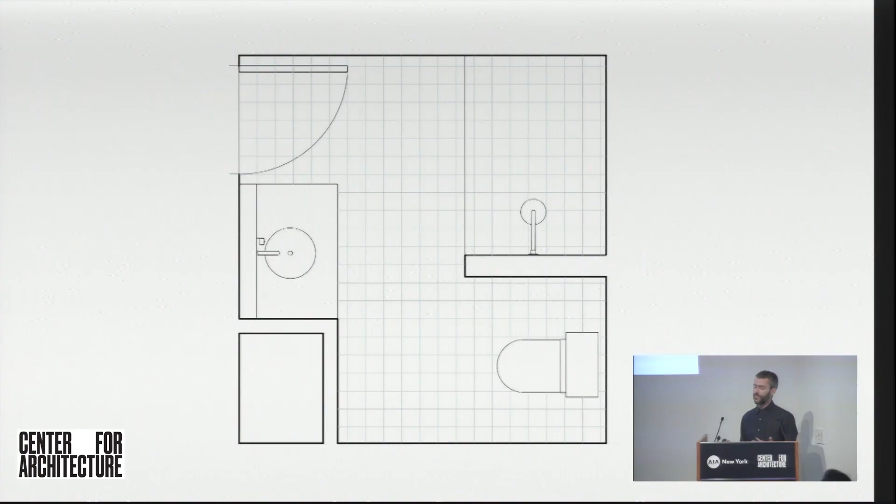So that started really with the premise of how do we install grab bars and other features like that that don't take away from the feeling of the bathroom. So the more we started thinking about it and talking about that, I really started trying to think instead that maybe the grab bar should be the protagonist of the project.

So the grab bar, disguised as a towel bar, wraps around the entire perimeter of the room. And instead of plumbing fixtures being something that take up all the wall space, they're clustered together in the middle as a kind of totem to everyday rituals.

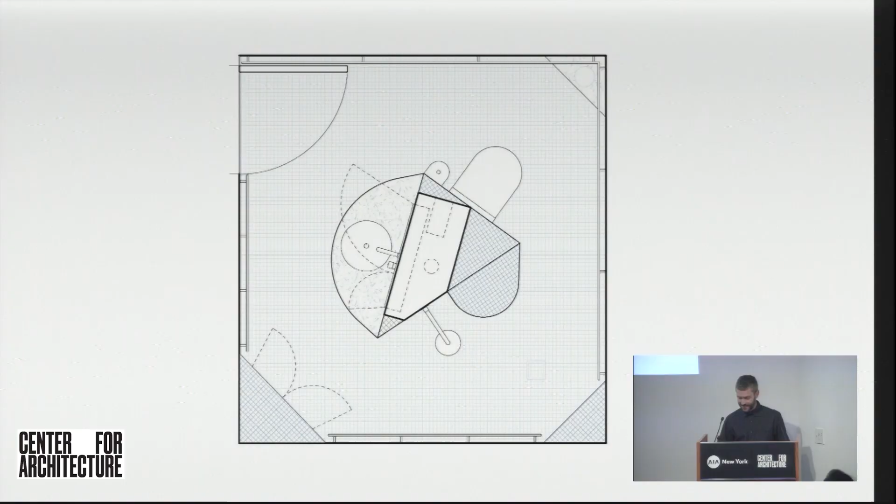The space is totally barrier-free with a shower and a toilet and a sink, and accommodates many individuals who can use the bathroom at the same time. Perhaps your spouse is showering while you're brushing your teeth. And at the same time it's a playful space.

And let me see if I can successfully play the video. Is that true?

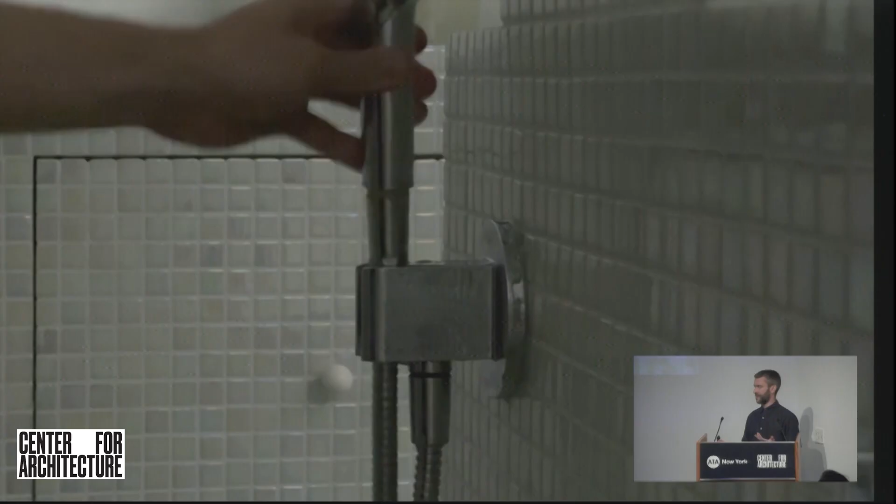I was really looking for it not to feel like it's designed for getting older. So the towel bar grab bar combo doesn't ever give away the fact that it's designed to be structural. The entire bathroom is wrapped in the same reflective tile that plays with light and movement as different people come and go from the room, and really allows the bathroom to feel like a sanctuary rather than something that is increasingly difficult to use over time.

The second project I'm going to talk about is for a house in Long Island on a somewhat unusual site that is very long and spans between two very different worlds. On the right, the walkable pedestrian area of the town of Greenport, and on the left, the wetlands. So the project is about spanning this difference between these two seemingly opposite ways of living in a vacation house. The client importantly wanted to not feel like the house was separate from the town, so it really was about bringing those two worlds together.

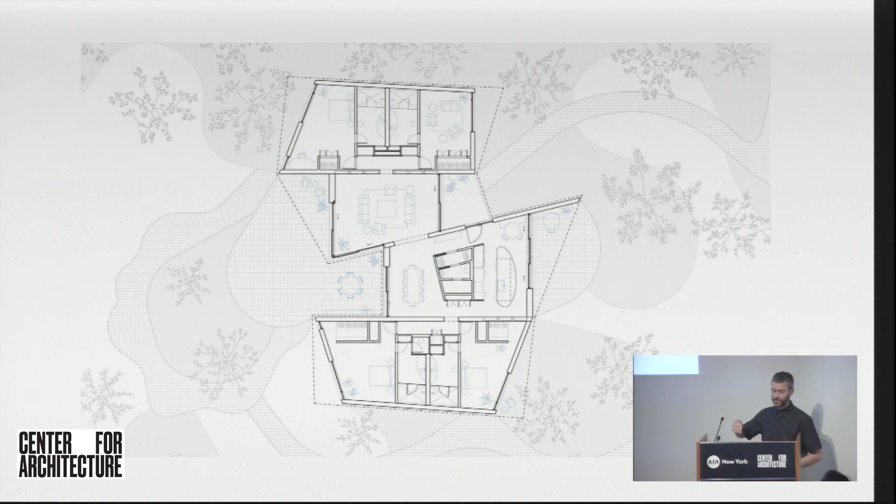So the plan is organized around a series of walls, and those walls subtly shift in angle to allow some of the spaces to open more towards the town and some towards the wetlands. The bedrooms are on the north and south side of the house, and as residents move into the more shared areas and into the bedrooms, they're offered an oscillating experience of seeing different framed views out to the landscape.

The roof that spans over these walls is curved to take on a variety of different scales and complements the varying scale of the plan with a varying scale in section as well. So it becomes a kind of vocabulary to modulate small intimate spaces and large collective spaces. This is also the project that there's a model of over there, so you can look at that after.

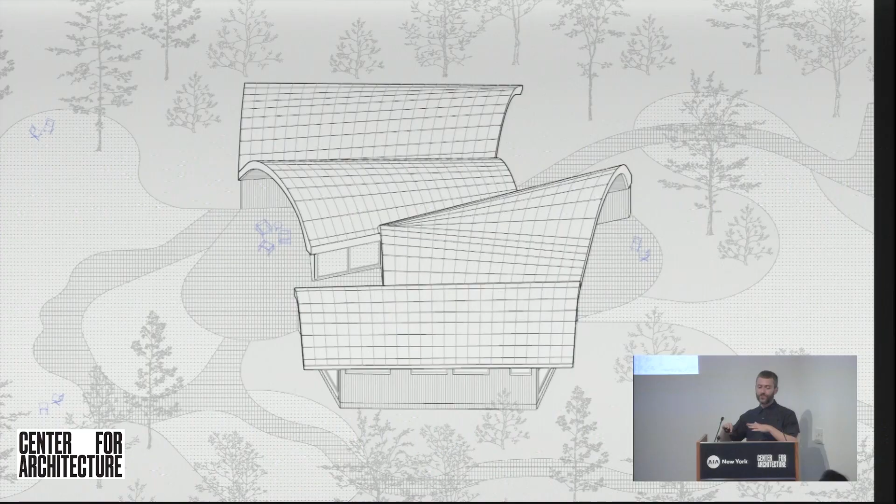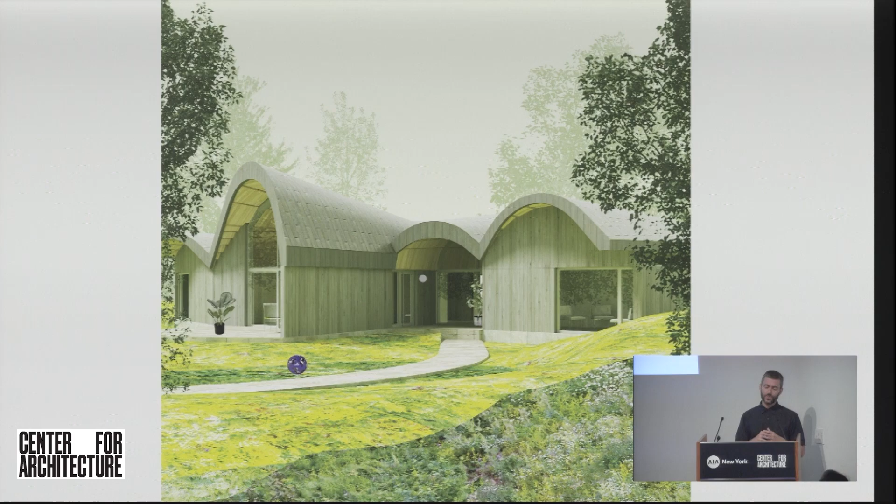The curving of the roof also allows the house to stretch out into the landscape and enclose some of the areas to become extensions of the living areas that get folded into the house. Because of the orientation of these walls and these varying heights of the curved roof, despite the fact that the house has one primary orientation, east-west, it kind of has no real front to it. So as you're walking around the house, it always takes on a different profile.

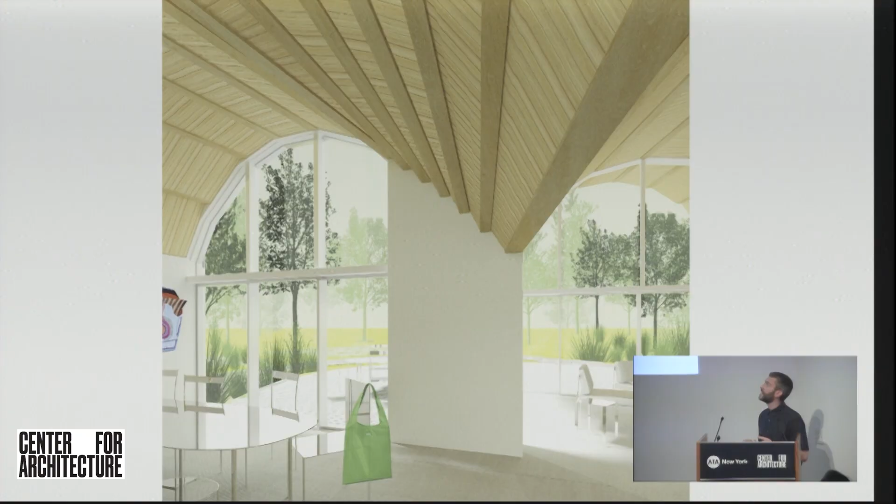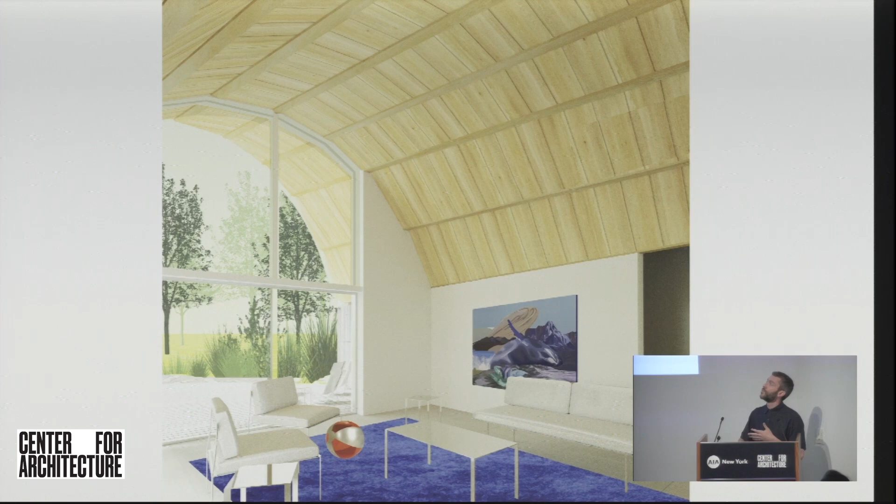On the interior, the roof curves down to softly divide public or shared areas of the house without needing complete walls, while still creating pockets of living areas. Bedrooms have the roof curve down lower, creating a more intimate experience, in contrast to the more shared areas where the roof lifts up higher and frames much larger expanses out to the landscape.

Coming back to the site, it really is a way of stitching together these two sides of the site. One interesting way that happens is that the two sides of the house look almost the same as each other too, so there's a way that you can leave the house from one side or the other and almost find yourself in a totally different world. It's a way of mapping these two worlds onto each other.

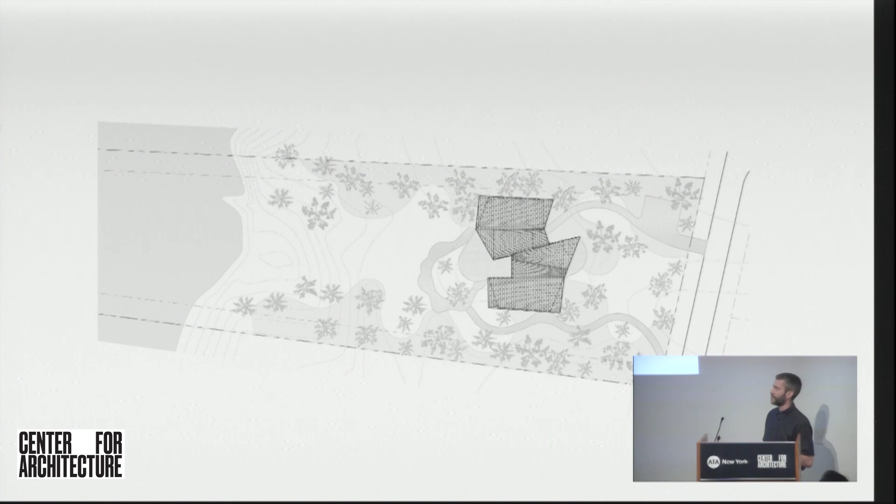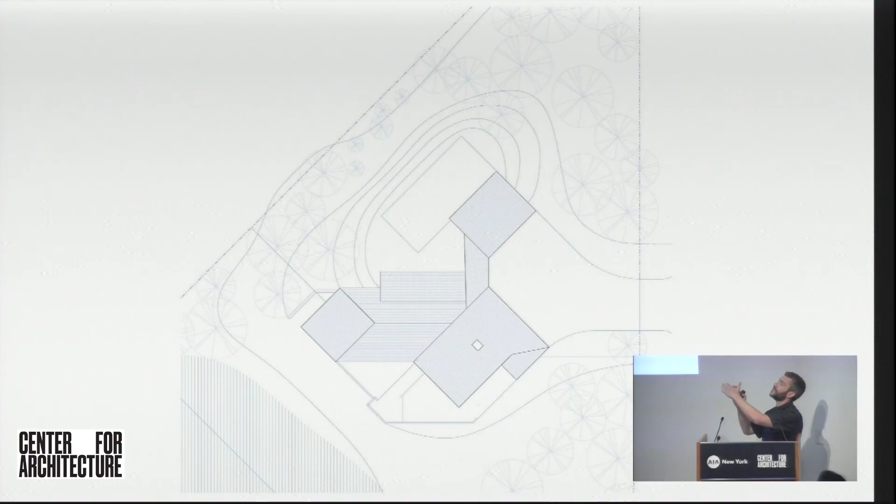The next project is an addition to a house in Cape Cod. This is a modernist, kind of strange modernist house. The client came to me looking for a way to add a second floor on this house, which at first is a seemingly terrible idea because certainly the best thing about this house is its super eccentric roofscape, in part put together because of the strange intersection of two streets that gives this a triangular site.

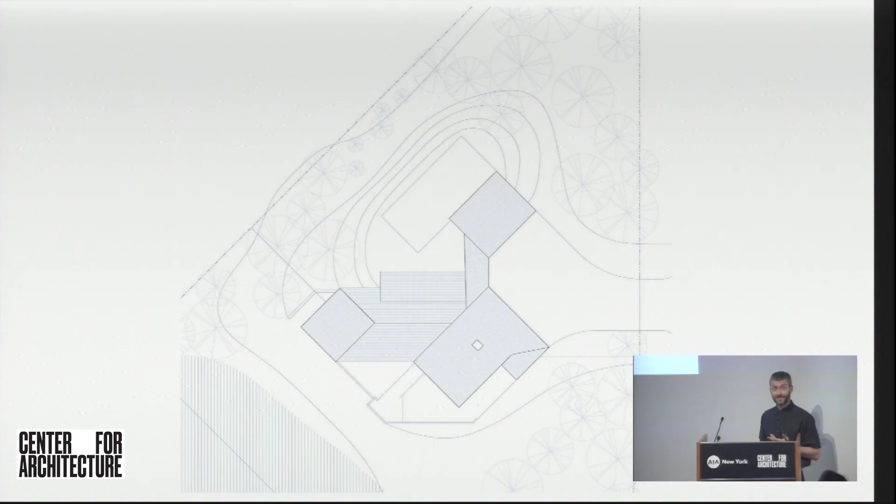So it's a collection of all of these different shed roofs that make this amazing landscape on the roof. So the puzzle really became about how to stitch a series of volumes into the roofscape as opposed to putting something on top of it.

So a series of three separate rooms, each at different elevations, offer something totally new to the existing house while also trying to make themselves totally a part of it at the same time. These volumes each find places to lock themselves in or tie themselves into folds, corners, or edges, finding opportunities to become collinear or parallel to existing parts of the house—finding geometric ways to couple itself with the existing roof, making it inseparable.

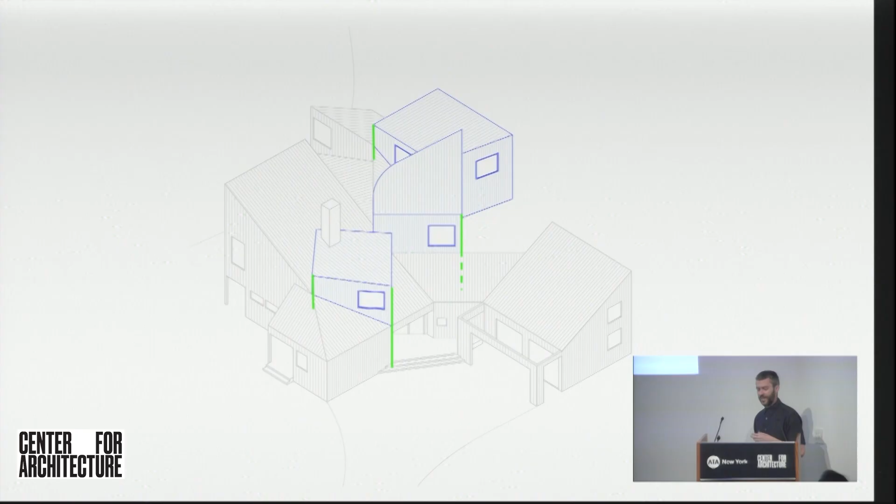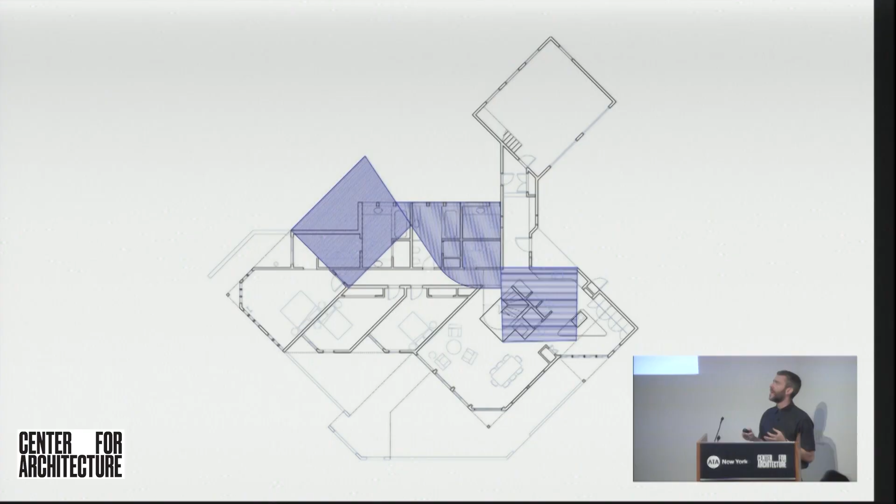The other way that happens is through the plan. The existing plan of the first floor of the house was primarily one story. It had a single room on the second floor that these three volumes were added onto. The existing plan has a sort of atypical, unusual use of 45 and 90 degrees because of those two streets it's organized around. So trying to think about where and how to locate these three new rooms was about finding opportunities within this logic of the plan to tie in these new spaces.

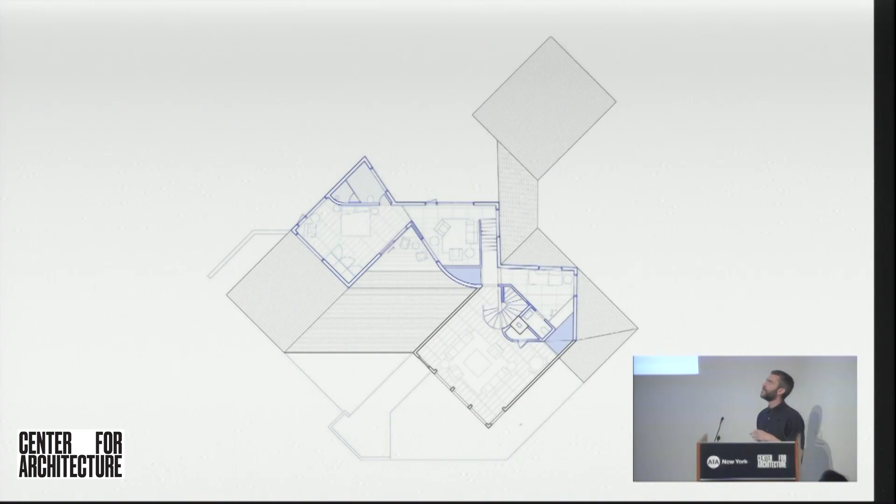And again, it uses those various points of corners or edges that extend from the existing structure into the new one to make these things seemingly inseparable from each other. But despite following the logic of the existing house and plan, the three new spaces are totally different. Unlike every other space in the house, this is a string of three new rooms that are all four-sided and connected through their corners, becoming a kind of thread of spaces with a totally different logic of circulation. By moving through their corners, it opens up the other three sides for expansive windows out to the landscape.

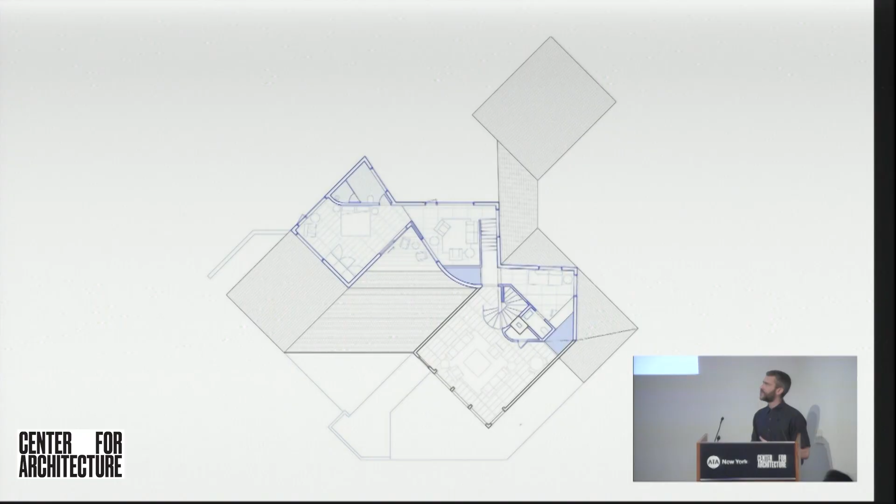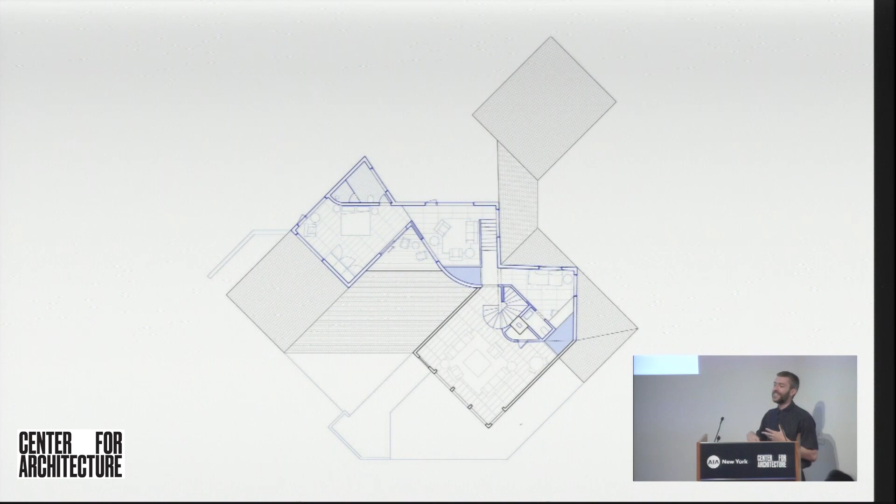One of the strange things about this house was that it seems to have been designed only to view the sunset, which is strange because it happens for a very short period of time. So there's almost one side of the house that doesn't have any windows, even though it's in a very bucolic place. So one of the things these volumes do that the house can't do is bring back that panoramic experience.

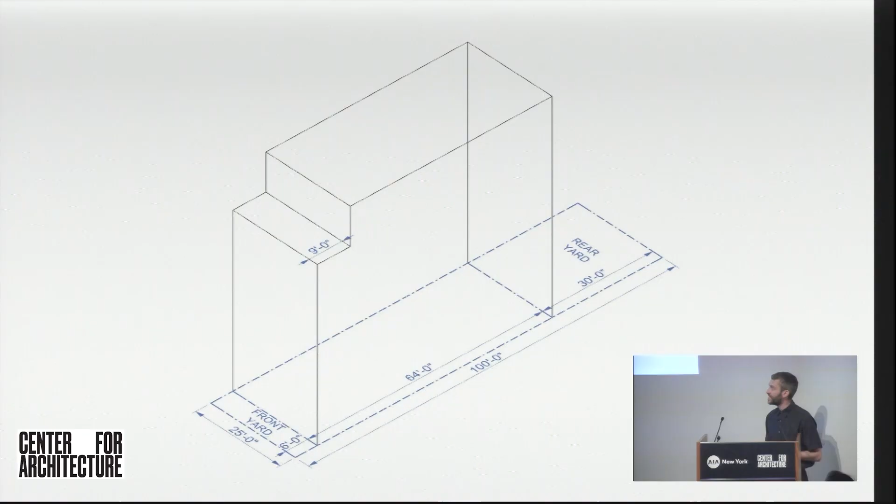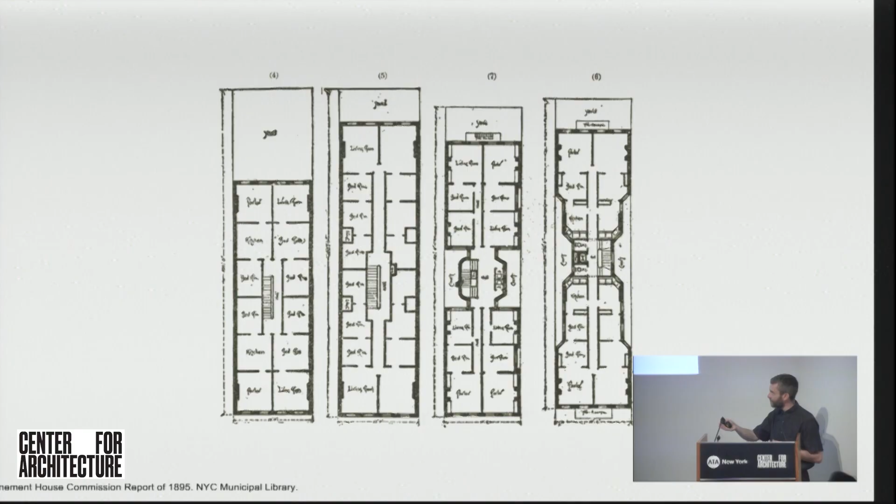The commonness of this problem, particularly for multifamily housing, is not new. We can think back to the era of tenements. This is the Tenement House Commission report from 1895, already 130 years ago, struggling with how to solve the narrow site with windows on the small sides. On the left is the conundrum of the tenement with many windowless rooms, and already at that time people were starting to brainstorm other ways of thinking of the typology. This turns into the dumbbell plan we still see all over the city today.

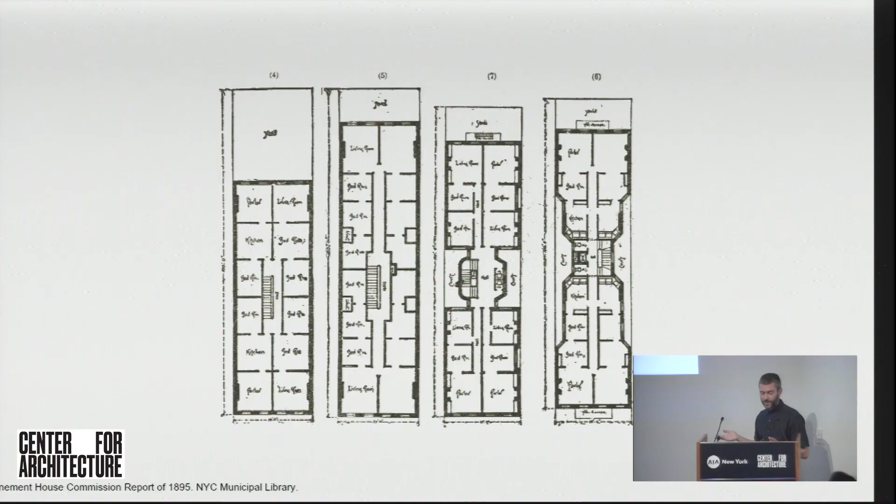So in thinking about this project in 2025, this is a site in a neighborhood with many other similar size lots and buildings, which permits essentially a 4 or 5 story building on a 25 by 100 lot. That's the formula of almost every other building in this neighborhood, typically an apartment building with 1 or 2 units per floor, with a dark middle of the plan and a core of circulation.

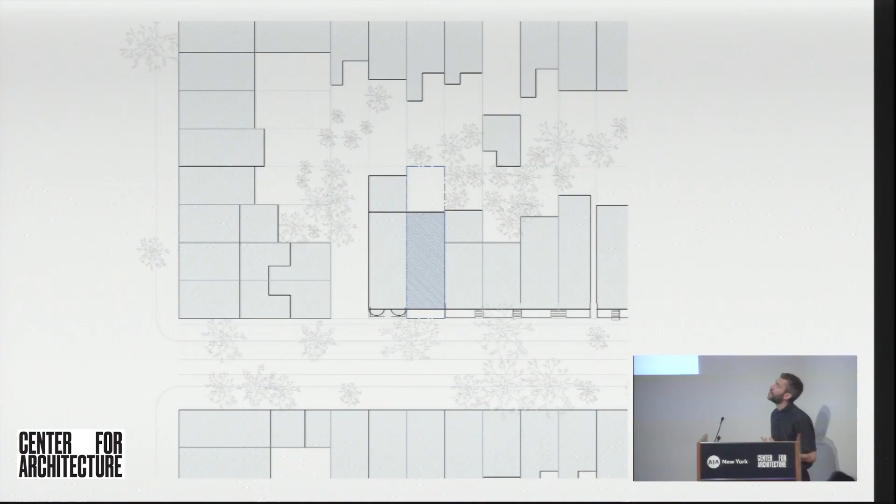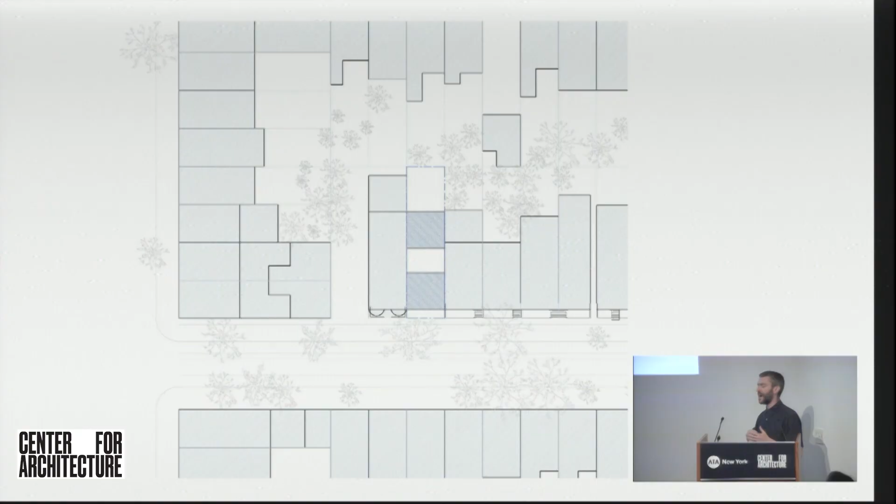So in thinking about this puzzle, we were interested in asking more typologically, what could we change to rethink this problem? We decided to split the site in half. Instead of one long site, it's 2 tiny towers, 25 by 24, with an outdoor space in the middle that becomes a hybrid between a stair, a balcony, and a fire escape, and also becomes a space for outdoor living. That center stair stitches together the 2 sides of the site.

The site is entered from the street and circulated up through this stair in the middle of the project. Unlike one unit per floor with 4 units, this also has 4 units, but they're 4 duplexes, 2 in the front and 2 in the back. That means for the same square footage, they have twice as much facade and twice as many windows. It's a way of switching the priority of how to organize the space given the same constraints.

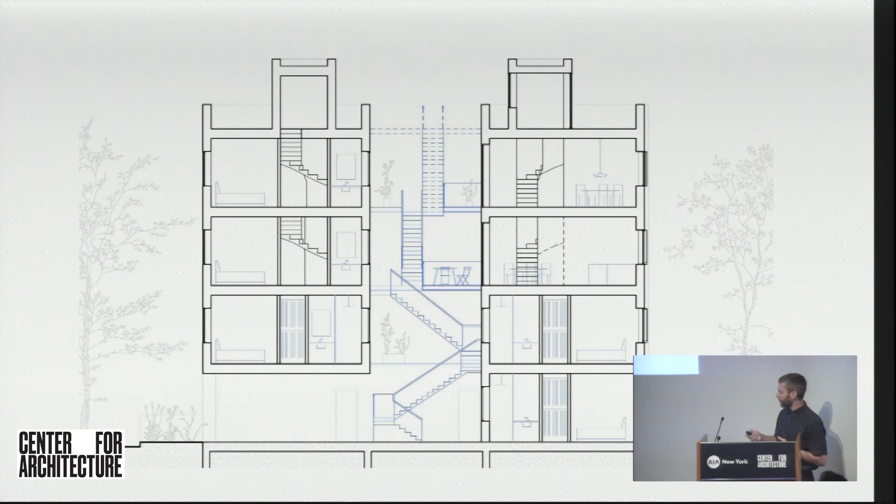On the ground floor, you enter under the first building and walk up the center stair. The bottom two units are accessed from the ground floor. On the upper floors, the living areas are split between each floor of the duplexes. So there isn't one living floor and one bedroom floor, but living spaces spread between each floor, allowing for maximum diversity of spaces on multiple levels with access to outdoor spaces in the center area, and also views out to the rear yard and the street.

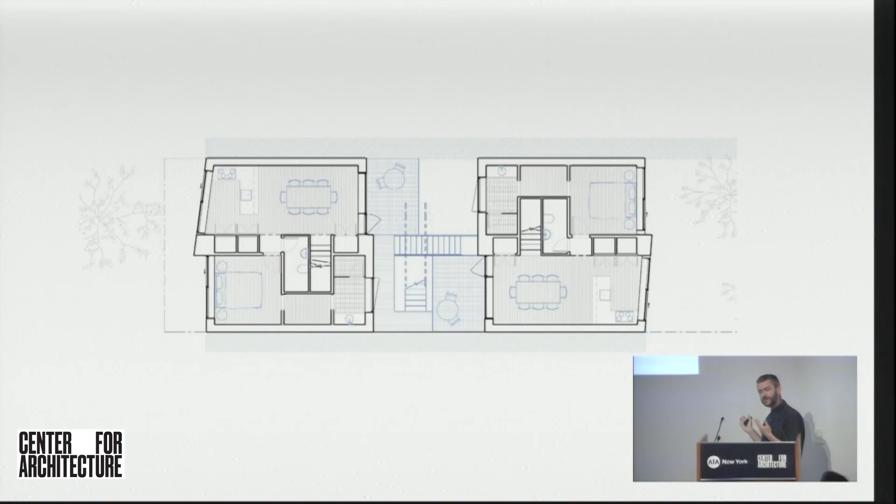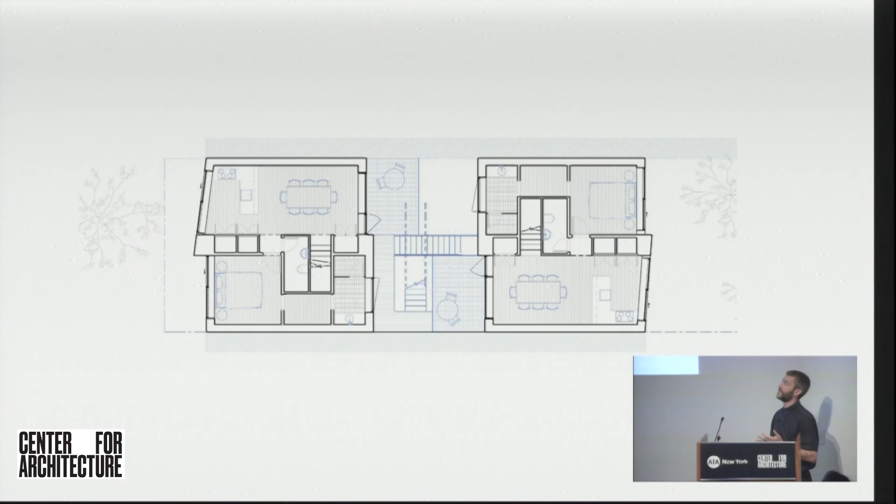The plan is also divided lengthwise with a subtle shift that allows for variation in the orientation of the windows on the front and back, which is a kind of interpretation of the townhouse bay window. This allows for a different orientation of windows to let you feel more expanse out towards the street or your surroundings. Even just a subtle shift allows for a different perspective in each of these different rooms that you find inside.

The center space is a kind of collage of expanded stair landings that become living spaces, but we've also been calling it a kind of jungle gym space because of its dimension. There's structure all around you, and it becomes a three-dimensional way of moving vertically through the site. Living spaces can extend out into these areas, and as you move up higher into the building, they also offer views out over some of the lower buildings around.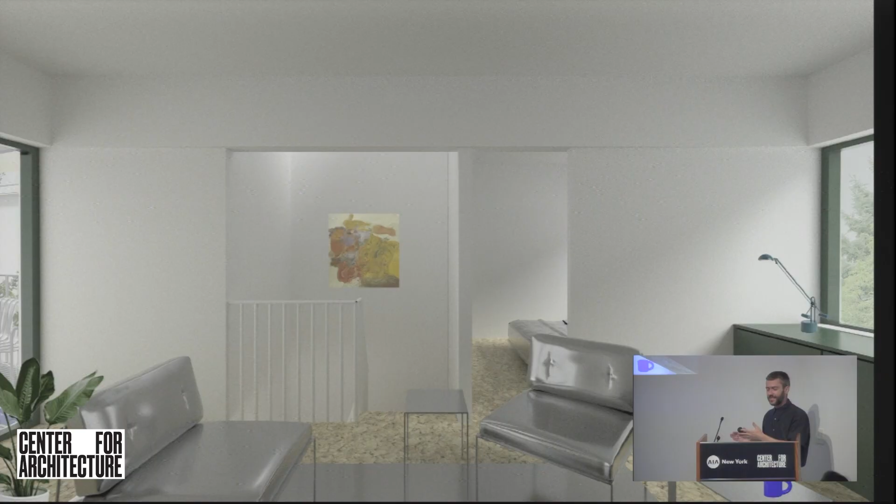On the interior of the units, all of the living spaces are 24 feet deep, so there's always a window in close proximity to each part of the plan, both to the interior and also to the garden or the street. This offers a variety of different proximities of living spaces to either that shared space in the center or the panorama out to the view of the street or the rear yard.

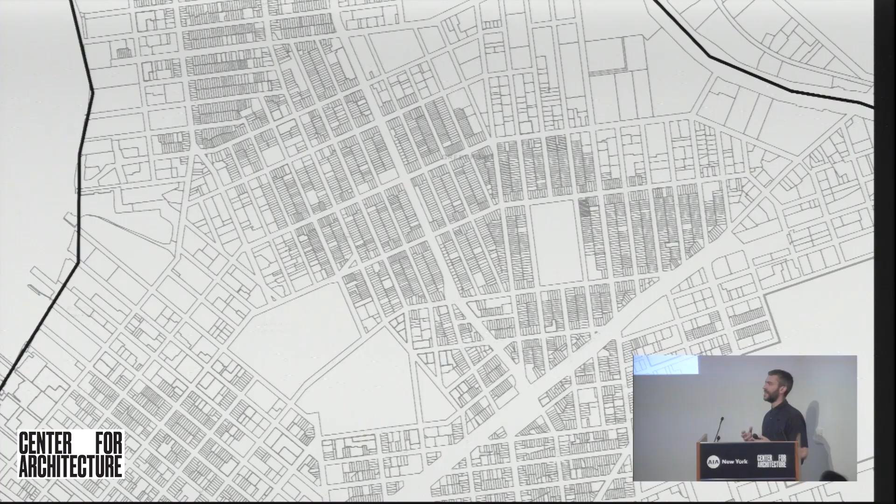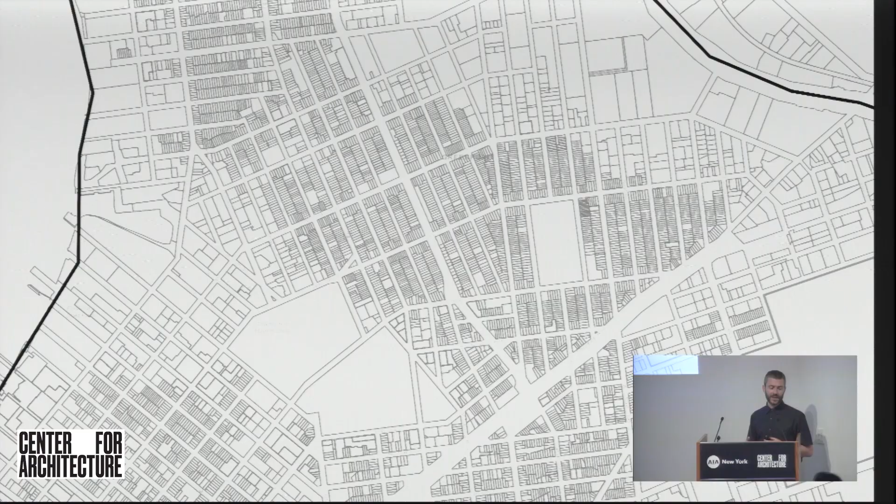So I want to end with this image to come back to the idea that this is, of course, a very common site and a very common problem. It allows us to start thinking of the way that even a small site or a small problem, much like the bathroom, can also be a question of typology, and a question of thinking about other ways of solving the problems we're familiar with, but shifting some of the variables in the process. Thanks very much.

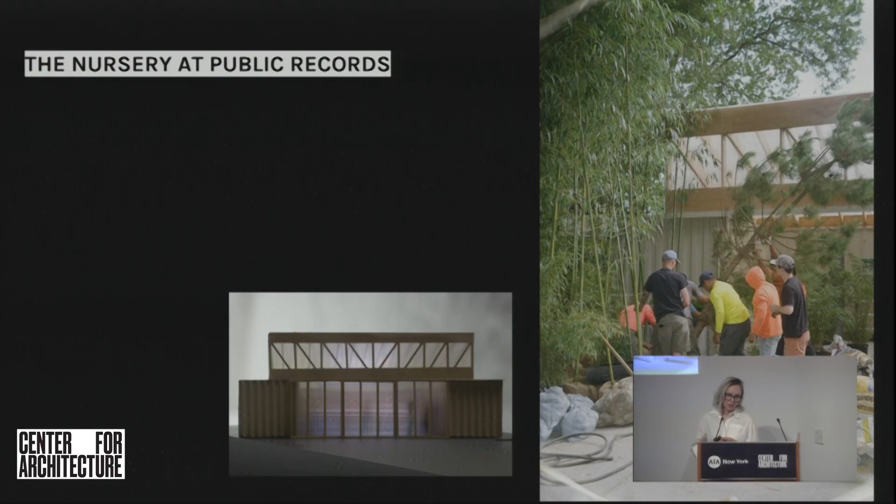We were really grateful to contribute our design for the nursery, which is their outdoor event space. Our work with them was in collaboration with Cactus Store, which is a landscape architect group, and this is their second space in New York City, so it's a really special opportunity to work with them too.

The concept for this space was to use what was already there, which were abandoned shipping containers. So we oriented them towards this C-shaped space, which became the winter garden for all of their tropical plants that they have spread out all over their campus. During the winter, they live in there, so really our first client was that collection of plants.

So we interviewed the plants, we understood what their needs were. It's a passively heated space, it has the solar angle of incidence, but then the space started to become actually really fun to be in and imagine parties in, and so it grew.

Into what is now a series of events at the nursery every Sunday where we kind of join and have the spiritual experience, look and aim ourselves towards the altar of the DJ. And all of the wood structures were kind of meant to allow this to happen without any kind of fuss.

So the structure design is all laminated veneer lumber, sourced from Weyerhaeuser. As you'll see as I keep going, I'm really obsessed with sourcing wood in particular. I research it. I think a lot about what it means to purchase wood from a particular manufacturer and grower. And in this case, we learned a lot about Weyerhaeuser.

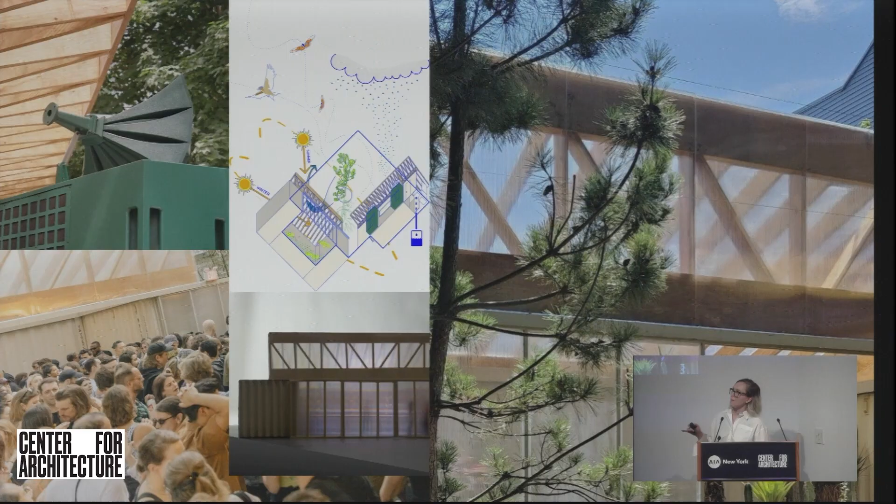We love this black pine too that was introduced to the site by Cactus, and that conversation there, we learned so much about what is native and what is not native to New York State, and we started to build our understanding and research around questioning that idea.

So in this case, black Japanese pine is not native to New York State landscapes historically, but we started to make the argument with them and with the team at Public Records that this tree is native to parties. It's really good at being kind of bumped around, and like accidentally cigarettes go out on its roots, and maybe a dog comes by, who knows, but it's really durable.

It's meant to be high up on mountains where the wind is just blasting it all day, so it's actually really good at being here at Public Records. And so we started to think about nativeness and not-nativeness in a different way, and how it connects to a kind of mini ecosystem that is the nursery.

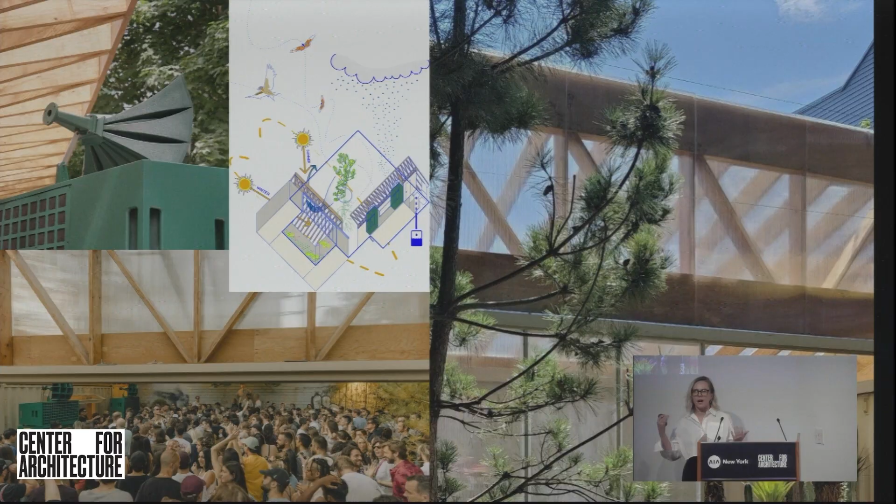All in all, highly recommend their nursery series that's going on right now. They have all sorts of community events here. There was one posted recently about a wattle and daub workshop they hosted where mud was everywhere. It was such a dream to see that kind of life happening in the space.

To have contributed these really simple structures to host that kind of community event. This passion and interest in sourcing and ethics, and questioning how this relates to and emboldens architecture, started a long time ago when I was a student. Back in the day when I was at GSAPP with my fellow cohort who are here today, I worked with Mabel Wilson and Kadambari Baxi on Who Builds Your Architecture, a nonprofit organization.

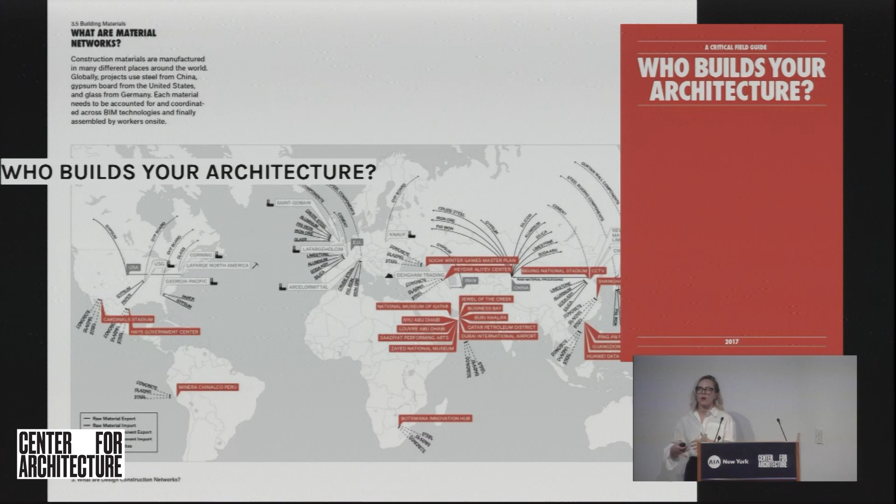We together published the Critical Field Guide. This was one of my first contributions to their research, a map of material flows globally, which shows that your architectural drawings and the sourcing you do activates landscapes far from your hand, far from your computer. When you type in timber, mass timber, cross-laminated timber, it ignites all of these machines somewhere, all these protocols for planting. That got me so excited. It felt like our work as architects was so important, that we were agents of change, even in moments where we're writing a spec.

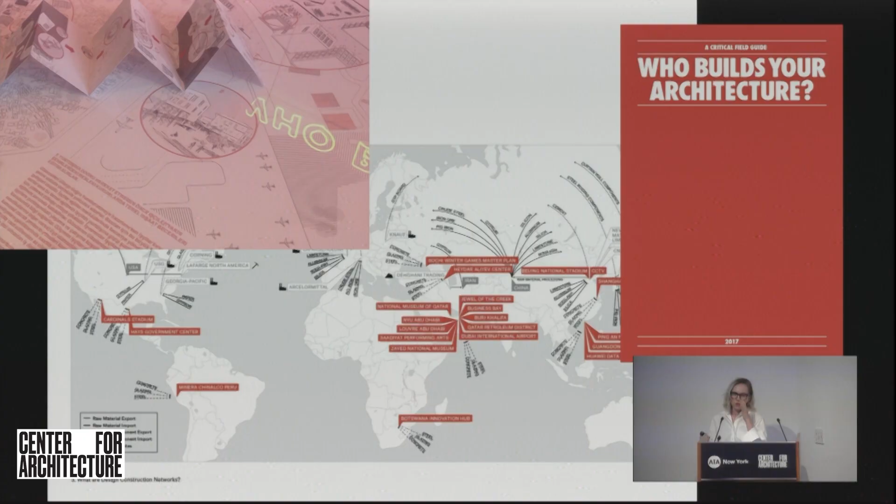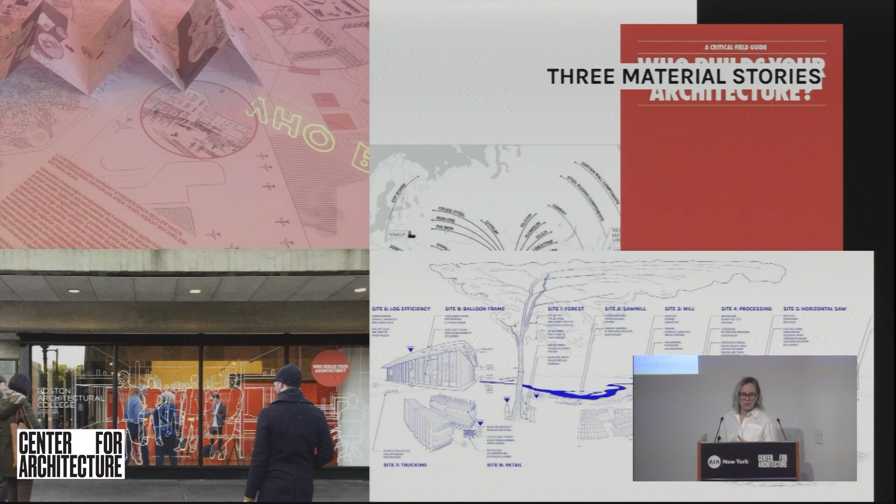So we did a number of exhibitions. I designed this exhibition with them at Boston Architectural College. That launched the commission for Three Material Stories, a series of drawings originally in the Embodied Energy and Design book by David Benjamin. They were then hosted at the Triennial in Milan, brought in by Paola Antonelli, and it became a kind of jumping-off point for my practice.

So now I'm going to try to do the same thing.

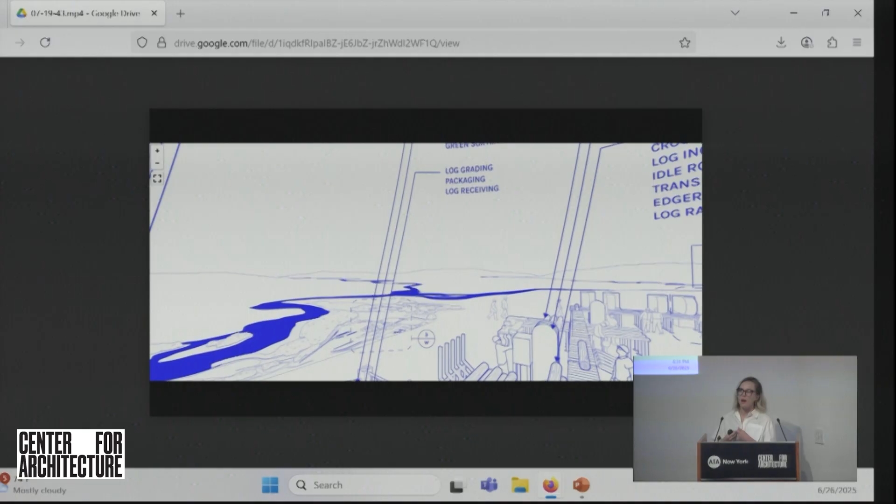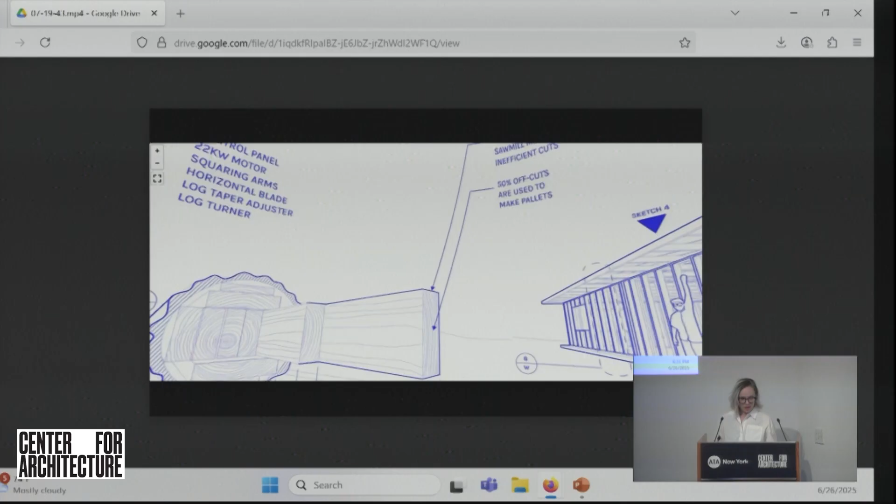Three Material Stories is a hand drawing - equirectangular or six-point perspective drawings. The idea was that you could unroll the whole supply chain of materials onto one piece of paper, print it on a table, and redline it as a group to really have a say in the way materials change the world, move across the world. They became spaces that live on a single 2D drawing.

PowerPoint slideshow. Nope.

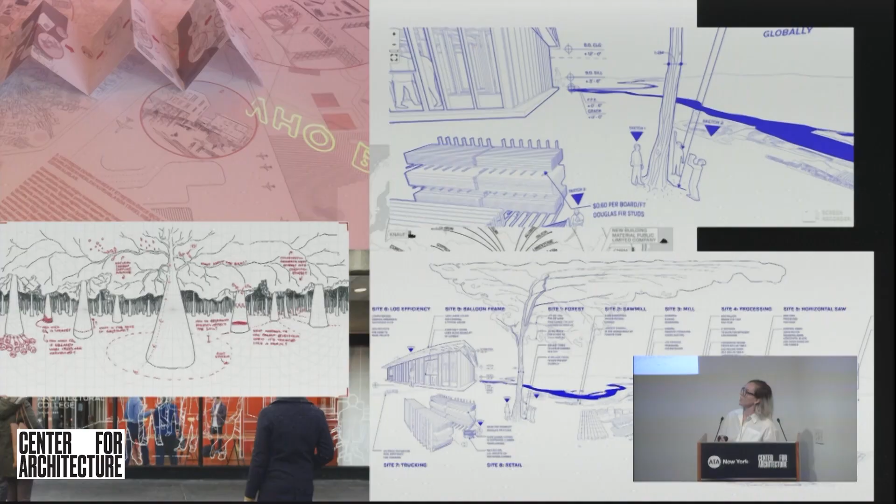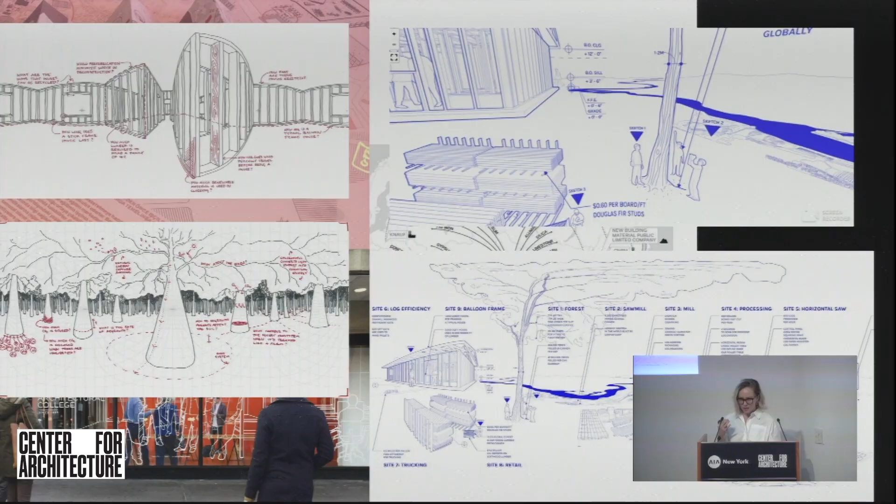With that contribution there were three large prints and a series of hand drawings. I thought it would be really interesting - and still is, especially in the context of AI and AI-generated images - to have a hand-drawn virtual reality series of spaces. So I taught myself how to do six-point perspectives as sketches, put them in this world, and redlined them from the inside. This idea of drawings, iteration, and material flows all fed early on into the formation of Mattaforma.

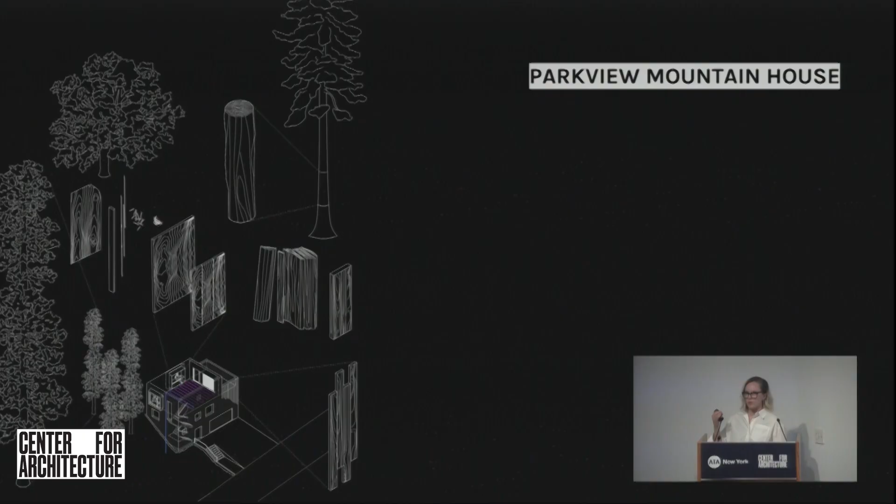One of our first hospitality projects completed is Parkview Mountain House. One of the earliest drawings we thought about was the beginning of the material flow right from the site. So we started at the top of the drawing and worked our way down as the project continued and became formalized.

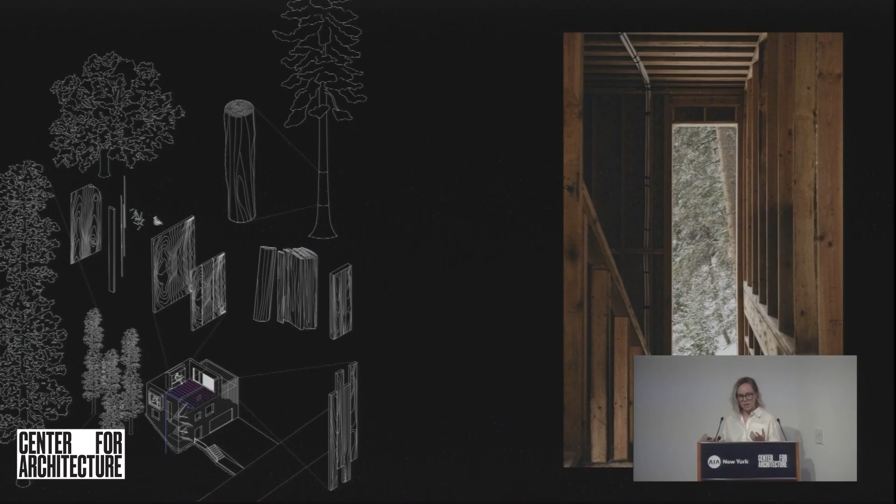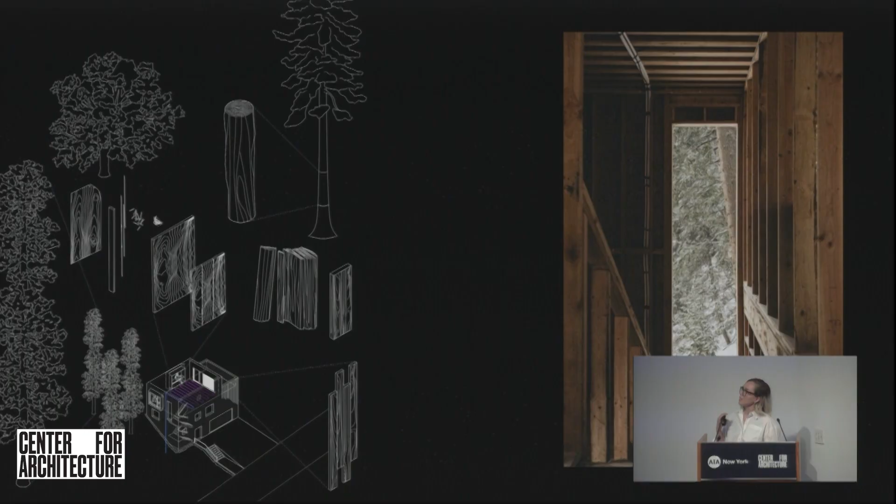This is a site in Park City, called Summit Park. It's a forest, so we were designing a building for the forest, and we had two really strong goals. Number one, any trees that have to be taken down because of construction have to be used in the building somehow. Number two, have the tiniest footprint you can possibly make. That helped us generate what we were calling a mini tower.

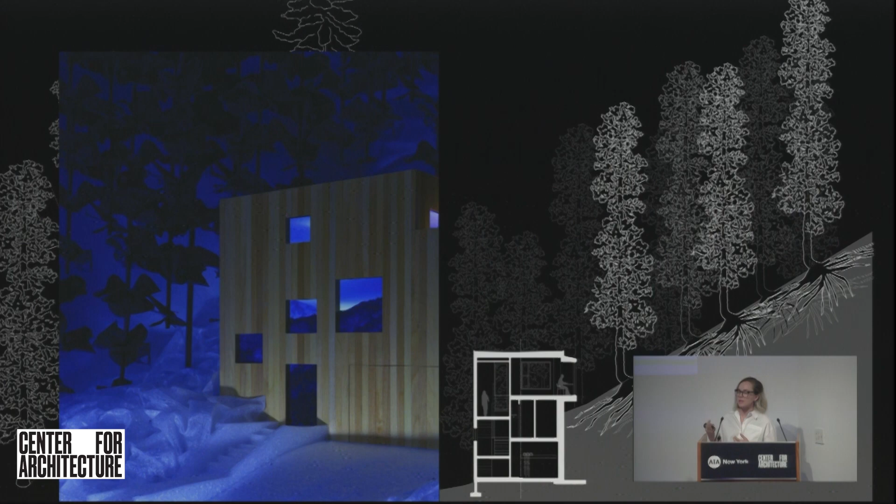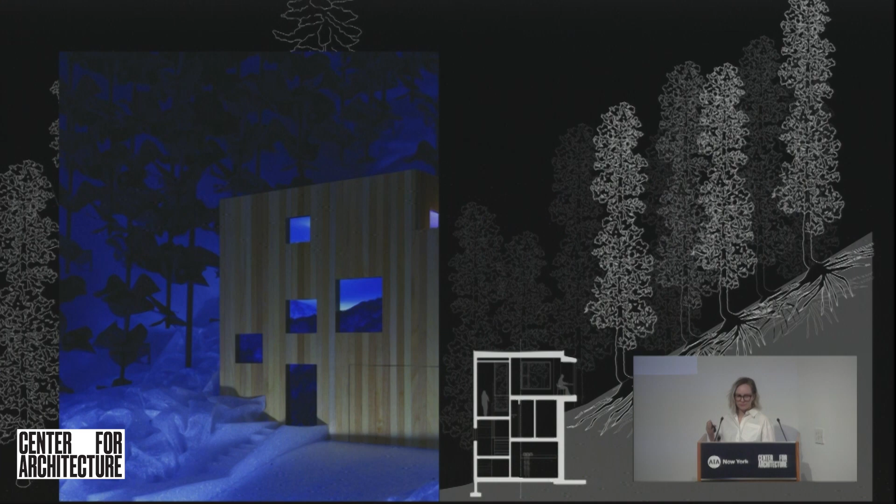The wood was an amazing experience to see those trees come down and be milled, but the timing was an interesting consequence. We thought originally we could have them as a finish in the space, but when you think about the energy it takes to heat up wood and the time it takes, it didn't match up. So we wait. The retaining wall actually is now an erosion preventer of the site, and hopefully will last longer than the wood structure. You've seen those photos of chimneys out in the woods that have lasted longer than the home, and that's kind of what I imagine here.

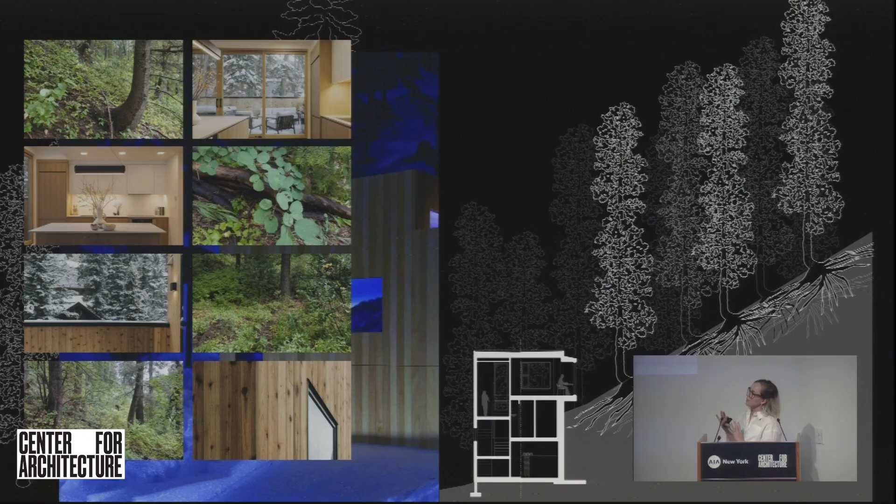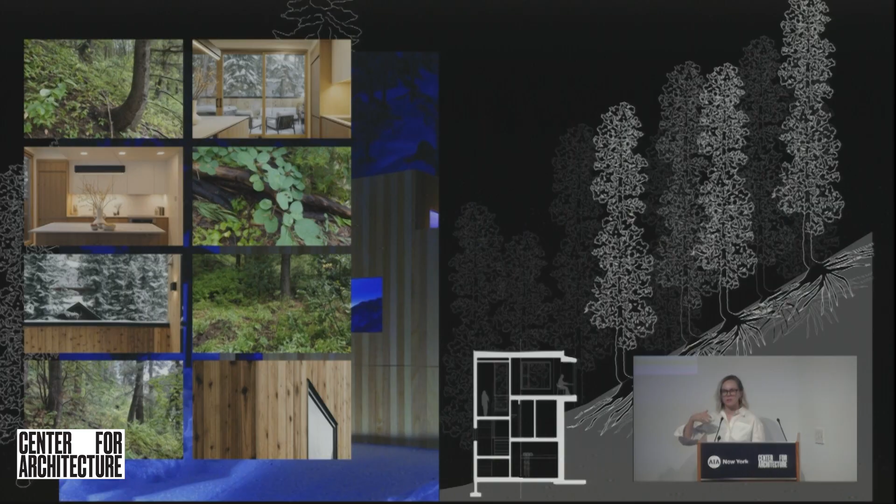We turned all of the views and all of the spaces of the interior towards the hillside to really reach out to these amazing trunks that are lodged in this 30-degree hillside, leaning towards the house. We thought that was really interesting and had this precarity that was beautiful, as opposed to looking out onto the more typical street.

Like I mentioned, my practice, Mattaforma, is rooted in thinking about architecture as a form of advocacy, and taking our day-to-day work—really the work of design and form, but also all of the paperwork, the spreadsheets, the emails—and thinking of those also as advocacy.

So when I wrote this book called Designing the Forest and Other Mass Timber Futures, published in 2023, it was meant to be kind of a follow-up to the critical field guide from Who Builds Your Architecture, but for mass timber. So folks of all ages, especially students, could read it and get a sense of what it means to design with timber, and how they might have a say in this space, and also what came before. There's this amazing history of forest cultivation that we so easily forget. Before oil, wood was like oil, and forest designs were things to be fought over—it was really important for the survival of any civilization that the forest be designed to support it.

That book has been foundational for the practice. I've done a lot of speaking engagements on that research, sharing it at all sorts of venues, not only universities but trade shows—specifically, my favorite was a lumber factory design trade show. They really resonated with this idea of designing the forest and the sawmill to be in sync.

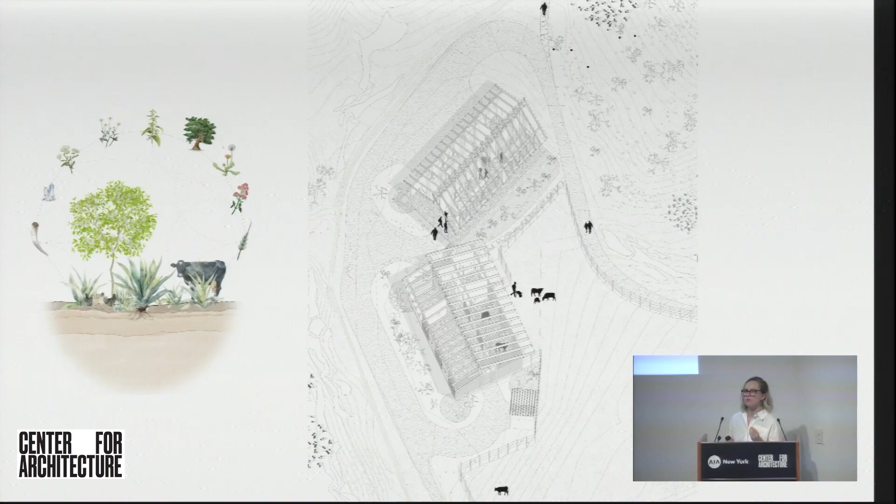And tractors and cars and water and sunlight and vegetation and cultivated agave—but we're also designing buildings and working on post and beam details, fighting for no steel beams, which we just got an email about right before this meeting: take that one beam out. Let's workshop that. Every single piece is meant to be super utilitarian and meant to last, but also accessible for the owner economically. There are so many different parameters to balance, but the main goal of Rancho Almos Almos is to bring people closer to the land and a better understanding of the abundance that the high desert has to offer.

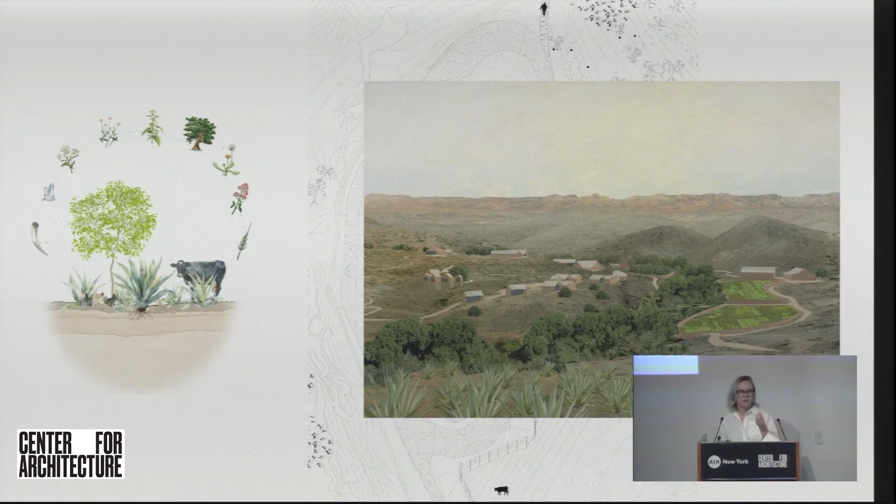So they're cultivating a lot of foods that were historically cultivated here, and bringing back an endangered agave species that was found on the site and identified by the Botanical Garden in Phoenix as being almost extinct. So they're really participating in this amazing story of ecological cycles.

We're also currently pushing forward a project in Chattanooga with our client Monospace. It's a beautiful idea about occupying an existing slab with a dinner series at first, and then growing it into a music venue, restaurant, bar. We just finished the special events permit, so hopefully we'll get that back with a big yes—good, build it.

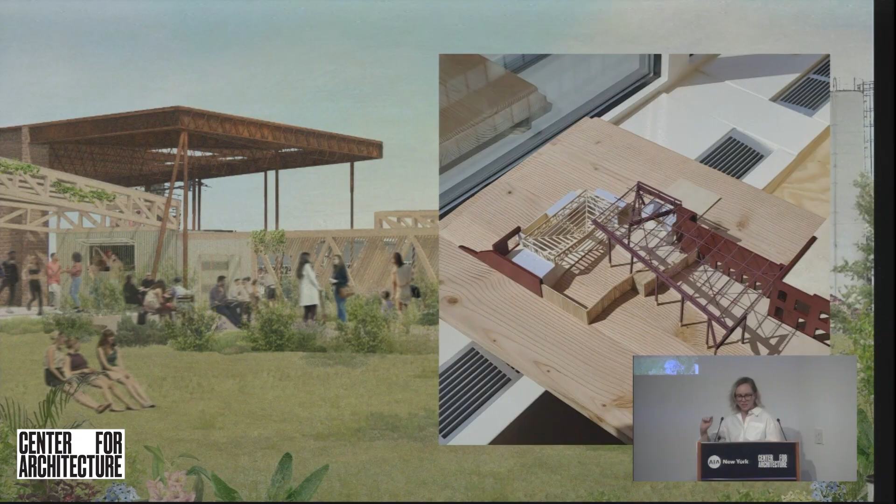Here's the model that Mara's working on right now in our office, and I think it's meant to be this phase one activation of an existing stoveworks factory under an existing steel structure, where the rail would come in and deliver the materials for the stoves to be smelted. So it's this transition from steel to wood structures, and we're also excited to kind of echo the truss forms and the thinness and essential character of what was a very productive building.

And so phase two, after this is phase one—phase two is in this building here and would be a full-on music venue. So thank you so much to everyone here, and I wanted to also make a quick note.

When we were at WBYA, Who Builds Your Architecture, we were constantly asking architects to create a credits list—like at the end of a movie where you see every single person that touched a project, like Mara's model, like Lindsay's email today. I think there's just so many people and so many hands and minds involved in architecture. So this is a big shout out to the whole team and everyone that's ever touched our work.

There's just been so many people, and I tried to make a big list on the wall, but we ran out of letters. So if your name isn't up there, it's in my heart. And so thank you so much for being here tonight.